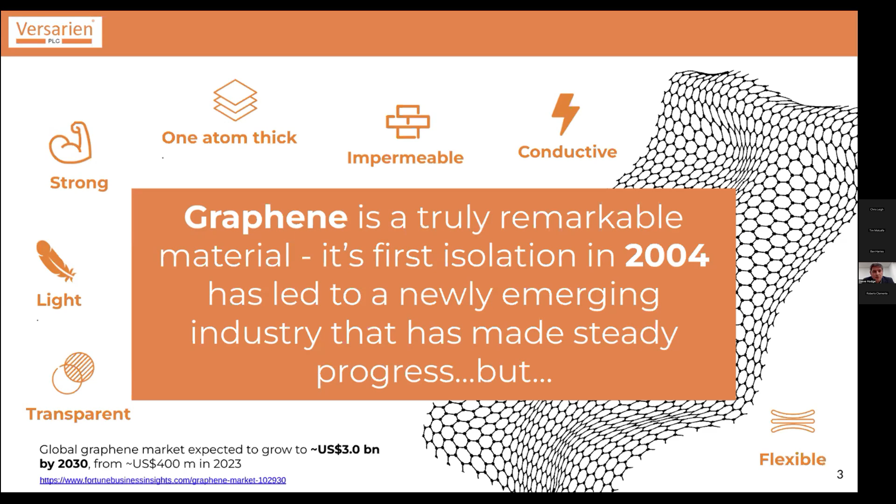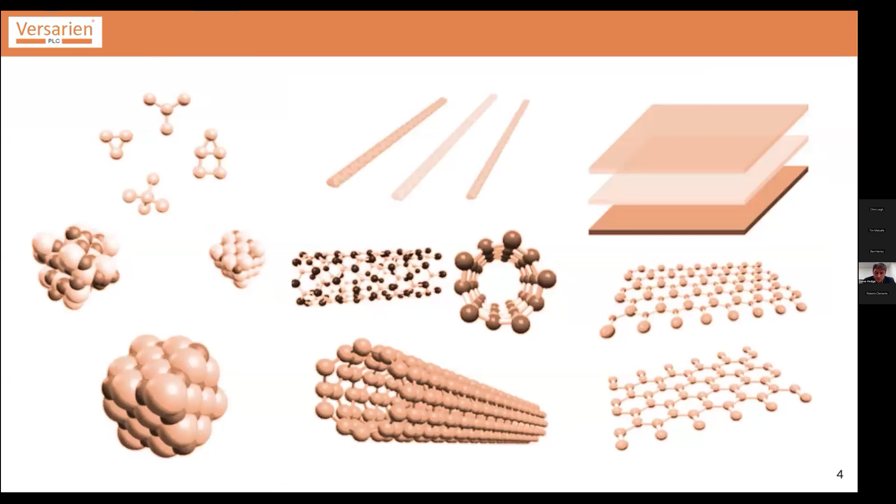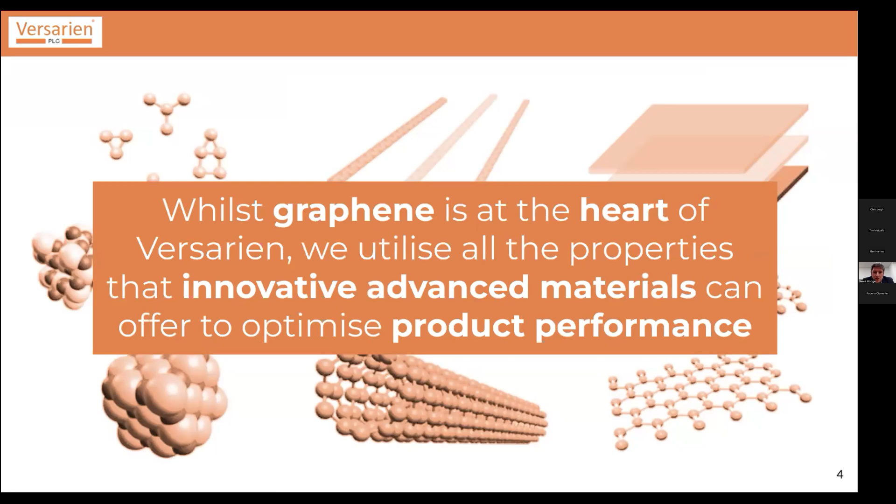Graphene will remain at the heart, but we're also working with a range of zero-dimensional metal nanoparticles, one-dimensional carbon nanotubes, and other two-dimensional materials in the graphene family. So whilst graphene is at the heart of Versarien, we utilize all the properties that innovative advanced materials can offer, such that we can optimize product performance and give our customers the best product that they require.

So in summary, we're an IP-led advanced engineering materials company. That's what we've been for a number of years. And we utilize proprietary solutions and technology that we take out of academia from UK and overseas institutes, and we create innovative engineering solutions. And to date, we are a globally recognized nanomaterials company. We've got a wide portfolio of high-quality materials, and this is underpinned by our UK-based R&D, which we're performing within graphene centres of excellence, such as Cambridge and Manchester University.

In terms of the board, currently myself and Chris on the call make up the exec team. I've been CEO since July 2023, but I was appointed to the board back in 2021. And my background is 15 years or so in advanced materials. My PhD was working on carbon nanotubes, graphene's older brother. And so I've had a vast experience with a range of different materials.

Our non-exec team, we have very strong support from Diane Savoury, who spent a long time with Superdry, taking them from SME to floating on the London Stock Exchange back in 2010. Susan Bowen, who has recently become the CEO of the Digital Catapult in London. And Sir Ian Gray, who was knighted last year, spent a long time in the aerospace sector and as chief exec of Innovate UK, and again brings a very strong technical background to the business.

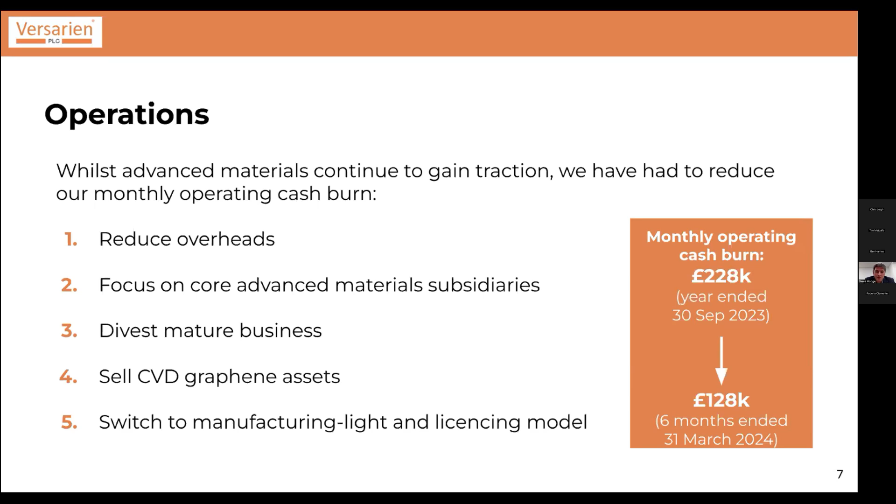We're in the process of selling our chemical vapor deposition assets that are in South Korea, and we've switched to a manufacturing-light and licensing model. So we're monetizing that IP that we've developed over the last 10 years and also that we've acquired. So these are our 5 core businesses. Versarien Graphene, that was established here in Gloucestershire a few years ago, and that's dedicated to manufacturing our graphene and advanced materials.

2D Tech was a spin out from the University of Manchester that was acquired in 2014. And again, that technology we're still developing and scaling up the production of graphene powder that came from 2D Tech, and that's being performed now in Longhope in Gloucestershire.

Cambridge Graphene was acquired in 2017, and that business grew from developing novel 2D inks and dispersions utilizing graphene and other similar materials. In 2018, we acquired Gnanomat in Spain, so that was our first venture overseas, and Gnanomat's focus is on energy storage materials, and Roberto is going to talk you through some of the activity that Gnanomat's been performing over the last 12 months.

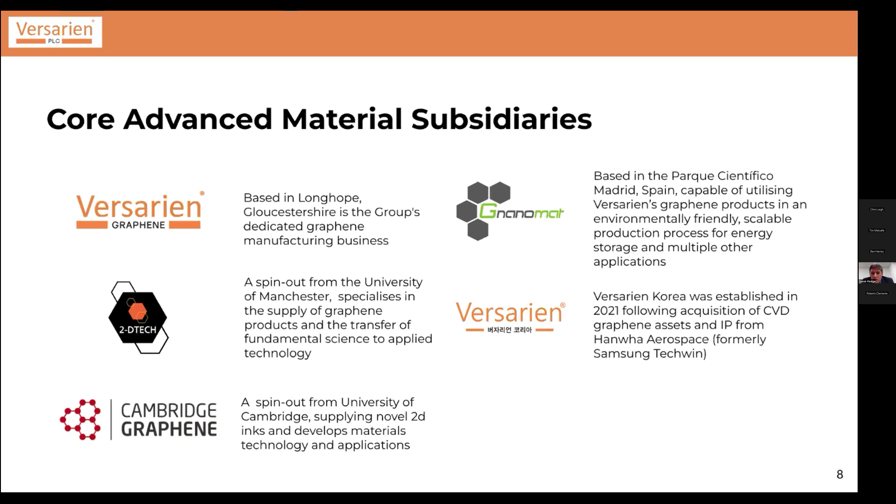In 2021, we established Versarien Korea. Again, that was following acquisition of assets from Hanwha Aerospace, so a lot of IP and also the equipment to manufacture high-quality single-layer graphene. And that's equipment that we're in the process of selling to another Korean partner at the moment. So these are our bases in the UK and overseas.

So in South Korea, we are co-located with Graphene Lab, which was a company that invested in Versarien during our move to South Korea in 2021. And we also have a foothold still within the GEIC in Manchester and people located within the Cambridge Graphene Centre in the University of Cambridge.

So in terms of those mature businesses, the intention was to look at selling both of those together. So AAC Cyroma, which was a plastics business looking at injection molding and vacuum forming of products, mostly for the automotive sector, and Total Carbide, which is our hard-wearing tungsten carbide company. Unfortunately, because of the differences in these businesses, they're quite diverse. The customer base is quite diverse, as well as locations. It's not trivial to sell them together.

So back in September 2024, we announced the sale of AAC Cyroma to Harper Bennett Limited, and the first of those installments is due this month. With Total Carbide, we have ongoing discussions with 2 parties, but these are still in fairly early stages.

In terms of the CVD assets, as I mentioned, these are equipment we acquired in 2021. In March 2024, we entered into an agreement with MCK Tech in South Korea. So MCK Tech is a relatively young company with the CEO, Dr. Sungmin Cho, who was one of the initial inventors and is on most of the IP that belongs to Versarien. And so it seems a natural fit to sell it to an owner that actually has ideas and knows how the equipment runs and operates and can run a successful business using this equipment.

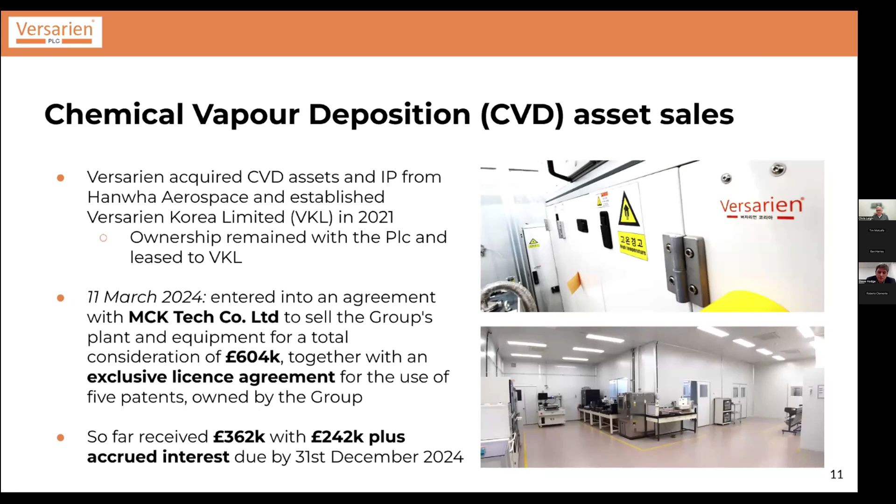So the group structure currently looks like this. We've got 43 people in total across the whole business, 21 of those sitting within Total Carbide. So the remainder are within the advanced materials divisions.

We've notably increased our stake in Gnanomat from 62% to 90% over the last 6 months. And that was a convertible loan that will allow Gnanomat to now apply for local government funding, which could be quite significant for the company. Versarien Korea is 85% owned by Versarien, with the other 15% owned by our investor Graphene Lab, based in South Korea.

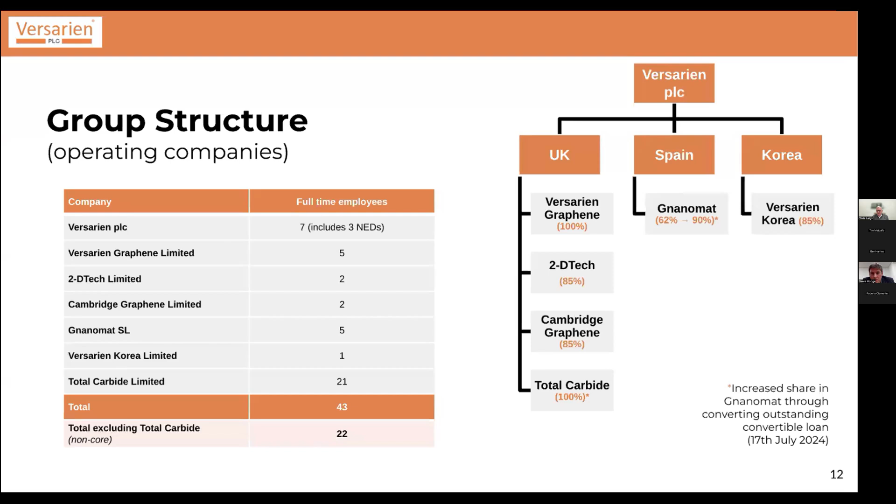Chris, I'll pass over to you for this slide. Thank you very much, Stephen.

Good afternoon, everybody. Obviously, with the audit ongoing at the current time, there's a limited amount that I can say about the current financial position, but I just wanted to address a couple of points, if I may. If we look back to December 2023, we announced that the company's projections were showing an EBITDA positive position being reached in the second half of 2025, obviously assuming the conversion of sufficient opportunities into revenues for the company. Our current projections have not changed in this regard, so we're still expecting the same thing, but obviously it depends on a number of assumptions.

In terms of the balance sheet, one of the things I know is of interest to shareholders is where we are with the Innovate UK loan. And we announced back in December 2022 that Innovate UK had offered to vary the terms of that loan by deferring commencement of the capital repayments so that they began in August 2025. So that first capital repayment of 500,000 is due around the time that we reach break even.

Clearly, that's an issue that we have got to address and discuss with Innovate UK. But just to provide some level of comfort, and obviously I can't speak for Innovate UK, one only has to look at their website, and there's some remarks on there that say if you cannot pay back in line with the loan conditions, they will work with the company to agree on a way forwards.

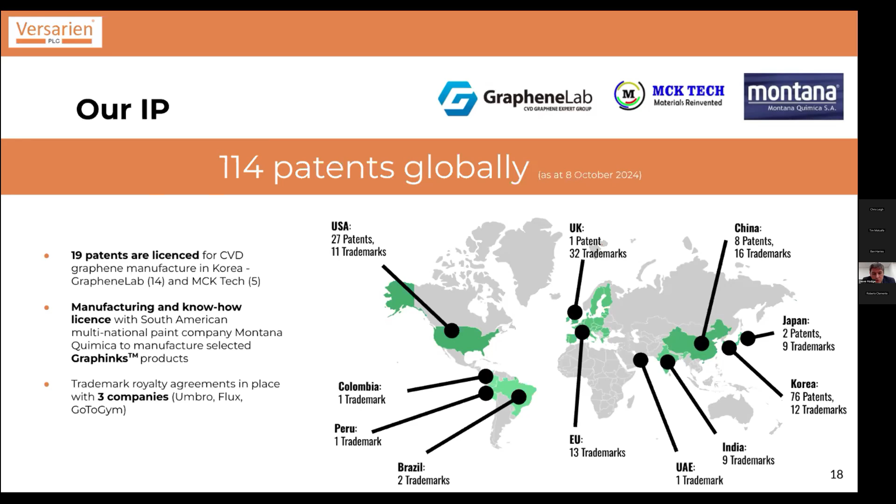We also have royalty and sales agreements in place with companies, and we're still pursuing a number of Graphene-Wear opportunities. Mostly I see this happening through companies such as GoToGym, so they're doing a fantastic job in South America, engaging with a number of companies to supply both Graphene-Wear formulations and graphene printed fabrics. With Flux Footwear, we're also working on larger orders, and we're trying to fulfill those at the moment. And again, we've had to look at moving some of the manufacturing and the compounding overseas where we can get lower pricing.

In terms of Umbro, we haven't seen any additional ranges being developed this year, and that's because Castore now own the license to some of the pro training and some of the professional sports from Umbro, and so that's conversations we need to start engaging with to try and get our products back into those clothing ranges.

So a bit on our licensing partners. GrapheneLab, as I mentioned, they were a strategic investor into Versarien back in 2021. And we have 14 patents which are licensed to them for CVD graphene manufacturing. So their focus at the moment is looking at a number of graphene applications, but with a main focus on extreme UV pellicles. These are materials used in the semiconductor fabrication industry. And recently they announced with some new patented technology that they can exceed 90% transmittance, which is quite a big milestone. And hopefully they can continue to develop that technology further.

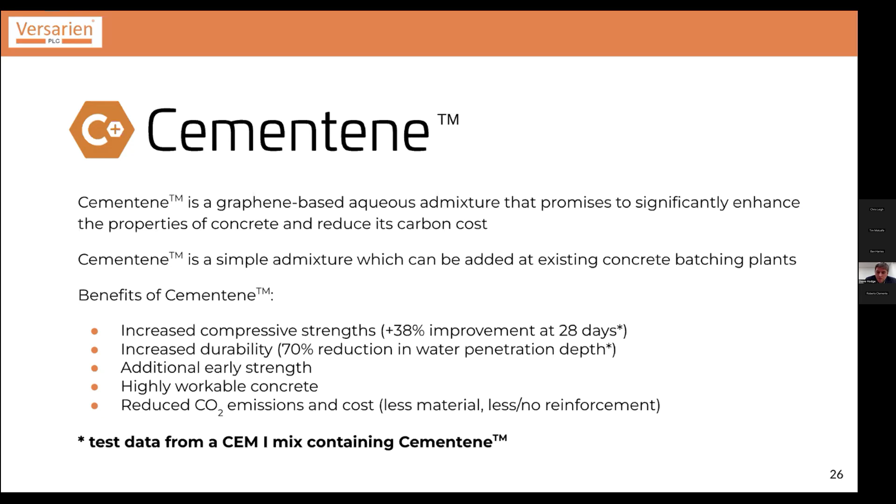And we're seeing improvements such as 40% of compressive strength, increased durability, both in water penetration and chloride migration. In some cases, getting better early strength, more workability, and we've also proven that we can reduce CO2 emissions. So just some highlights of results, not just improving one feature, but because of graphene's multifunctionality, we can also improve multiple characteristics at the same time. So we can improve compression strength, elastic modulus, and water permeability when we get the right graphene concentration.

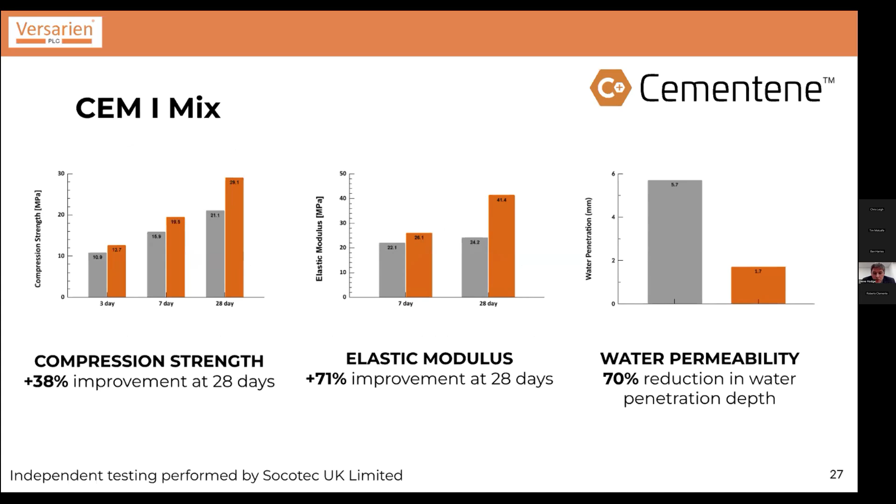So most of our work is done using independent test bodies, but now we're starting to bring our own in-house testing online. With Banagher Precast, we've reported this as an RNS in 2023. So we have some impressive results where, first of all, we looked at how we can improve the properties of their existing mix design. And we showed after 1 day, we can get 33% improvement, which is fantastic. If you can demold quicker, you can produce the precast structures much quicker, but also you're getting stronger concrete after 28 days.

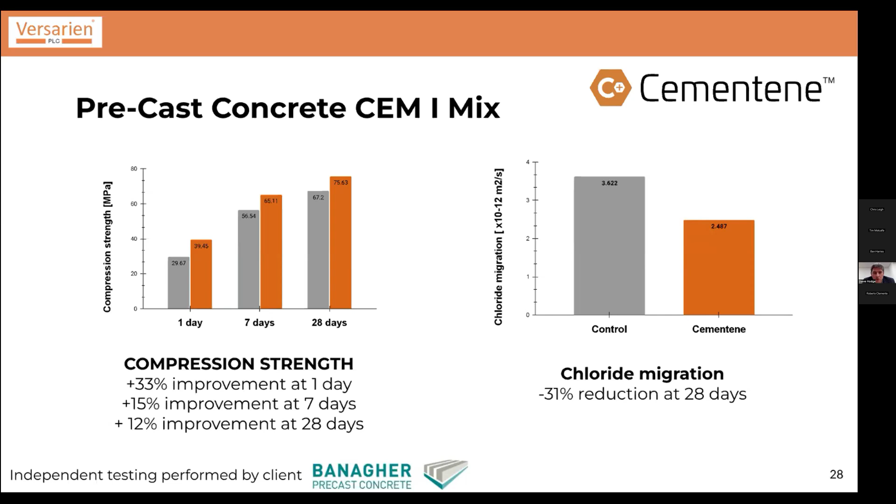One of the other benefits is chloride migration. So if you can reduce chloride permeation through a structure, then you can minimize corrosion of the steel reinforcement. So again, creating longer lasting, more durable structures. We then took those results and we looked at how much cement we can actually reduce. And we were able to maintain the same performance with 20% less cement. So that's taking about 100 kilos of cement out of their mix and replacing it with only a few kilos of our graphene admixture.

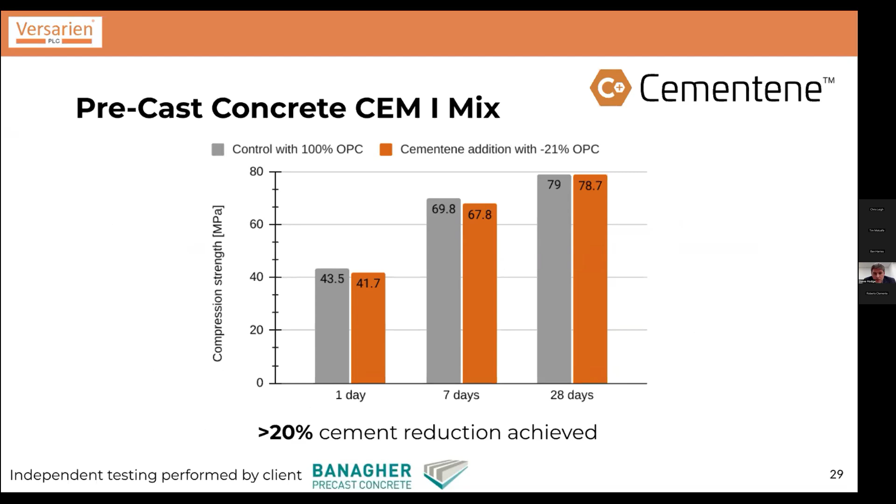We've then done further work this year, and with that same mix design, we've now cast some real life structures. We've been looking at traffic walls and putting those in the real life operational environment, and those will be studied over a 36-month period. Visual inspection and ensuring that graphene is not causing any unforeseen issues with the durability and the lifetime of those structures. So that's ongoing, and we're also now working with further trials with Banagher to further optimize the cement reduction that we're already observing.

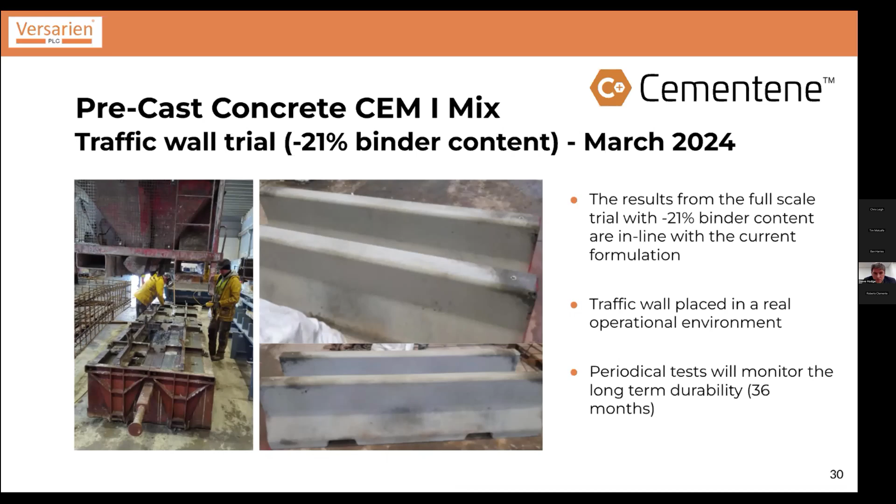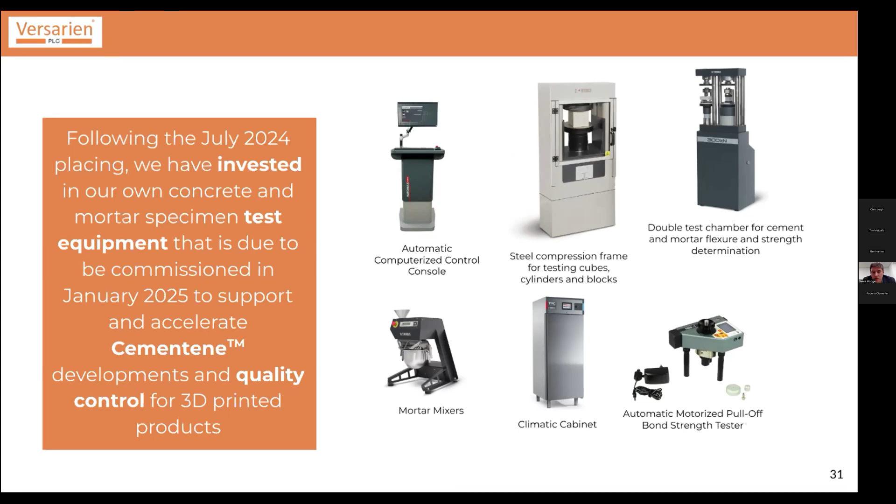So back in July, we had a placing, and some of that money was to be invested in our own concrete and mortar testing. So we've ordered that, and some of it has arrived. We're expecting commissioning to take place in mid-January, and that will enable us to accelerate the Cementene developments and also establish a quality control procedure for our 3D printed products. We've also been able to purchase some second-hand equipment and also additional molds that will allow us to increase our capability for how much concrete we can test at one time, and also water tanks that will allow for curing of more concrete samples.

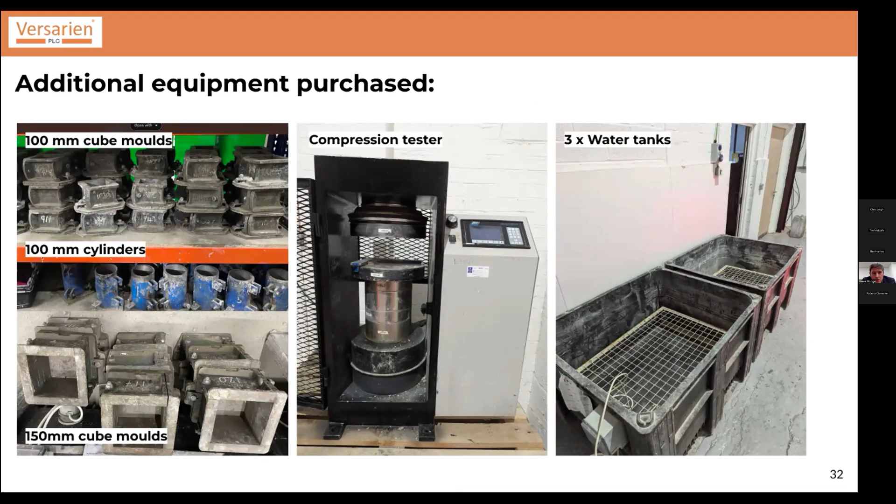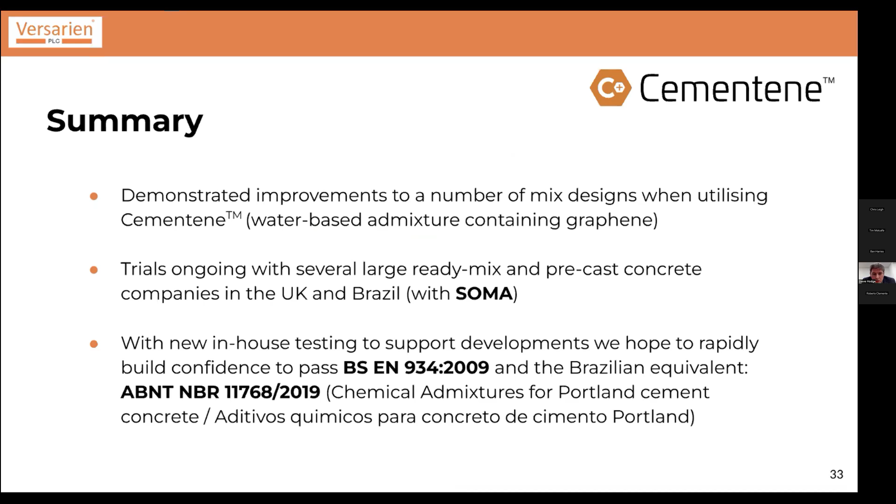So to summarize the Cementene aspect, we've demonstrated now improvements to a number of mix designs. We still have more work to do and more confidence to build with our mix, and also optimizing our Cementene recipe. We've got trials ongoing with a number of ready mix companies and precast concrete companies in the UK and now in Brazil through Soma and Montana. With our new in-house testing, we're hoping to rapidly build confidence and to accelerate our testing towards BS EN 934, which is the admixture standard, and also going for the equivalent standard in Brazil to make sure that these products can be legally sold in different territories.

I'm going to pass over to Ben to talk through the 3D construction activity. Thanks, Ben.

Hello, everyone. So I'm Ben Harries. I'm a former architect and current head of 3D construction printing, or 3DCP, at Versarien Plc. I thought it'd be a good idea to start with some of the key benefits of 3DCP, just as a primer for those who aren't familiar, and why it's important. So firstly, our process, as you can see down the bottom there, is quick and convenient. In-house, we can design, visualize, and print parts, and we can go from design to production in a matter of hours. So compared to other methods, it's incredibly quick.

Reducing carbon in the printing mix. So the mix we use is up to 32% reduction in CO2 emitted in the production of the printing mortar. More on this later as we're looking to further improve in this respect. Reduce labour, so there's no workers handling concrete or building or striking formwork on site. The modules are printed robotically under controlled conditions and then shipped. Material and weight reduction can be significant, with material savings of over 50% possible in certain scenarios when compared with solid cast options. The weight saving also then creates knock-on effects in terms of carbon savings during transport and handling.

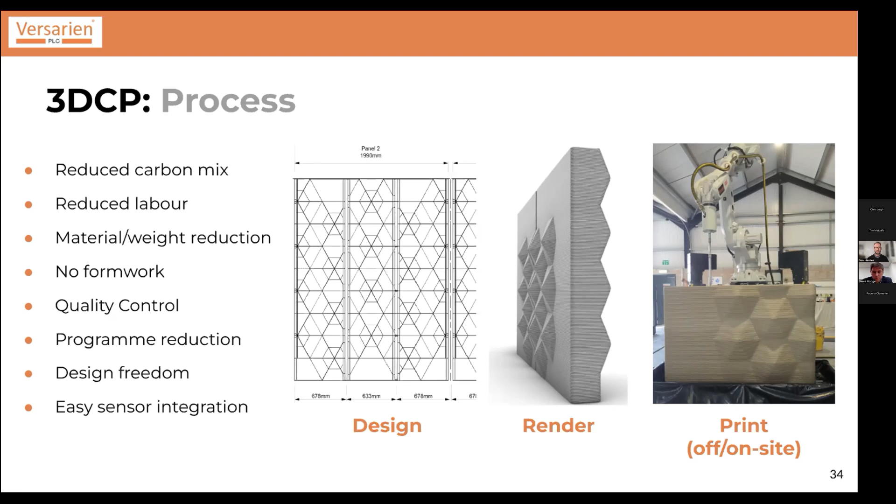So this head wall, which was produced in collaboration with Costain and National Highways, is now in place on site, and the project has been successfully concluded. This was a good demonstration of some of the benefits I just mentioned. By leveraging the ability of 3DCP to print curved forms and complex geometries, we're able to achieve strength geometrically as opposed to through the abundant use of steel reinforcement.

In fact, all of the steel was omitted from the walls in this piece, and the only steel that was left was there in the base, and this was needed to comply with Costain's own lifting and handling procedures.

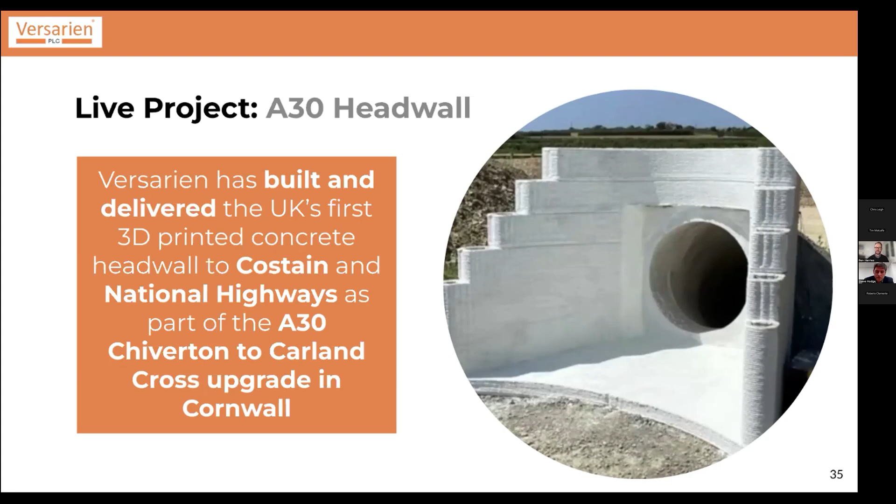Okay, so this is Charter Street. So this is by far our largest 3DCP project. This is working with Building for Humanity in Accrington. The project will comprise 46 apartments spread over 5 blocks. The first phase, for which we have been appointed, will consist of the first 3-story block and the community hub.

For this, we're acting as print partners for our clients. So this is a slight departure from our normal operating procedure, but quite significant. So what this means in real terms is that in the design phase, we're attending design team meetings along with the rest of the design team, architect, structural engineer, M&E, etc., providing professional consultancy services such as design support and technical input. And in the construction phase, our people will operate the client's 3DCP robot to get the building envelopes printed.

This is a significant step, really, not only because of the scale of the project, but also because it shows that beyond our factory production capabilities, our know-how and experience are also a valuable commodity. This will also significantly give us multi-platform experience, which is very rare in the 3DCP sector, as almost all players in the space are tied to a single platform, which has a specific set of capabilities.

Can we play the video now, please?

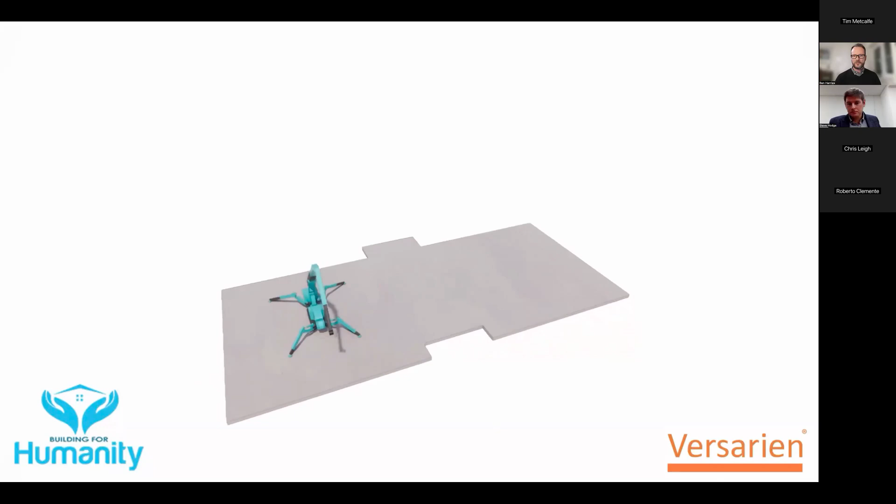This is just a quick video that you're going to see now demonstrating the construction sequence. It's just a simple video. So there you can see the ground floor slab. And so this is the robot that we'll be using with our clients at Building for Humanity. So as you can see, what we're doing is we're printing walls at the ground floor, each from one position on each side of the building.

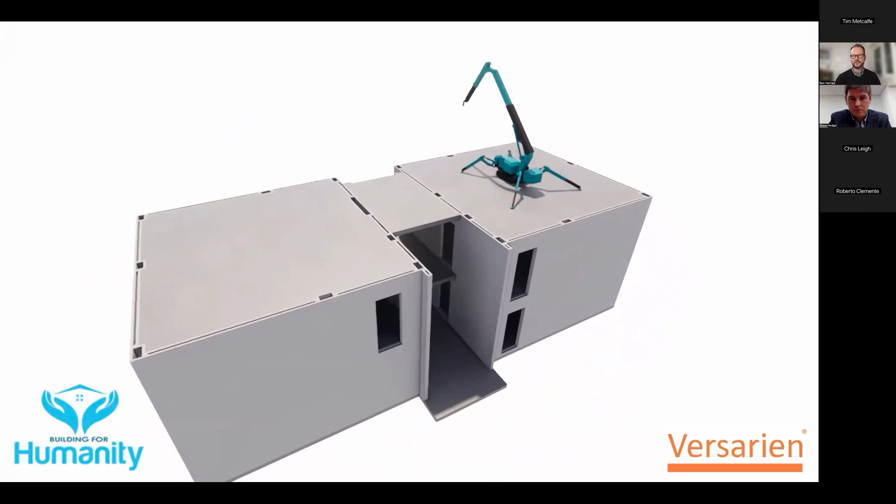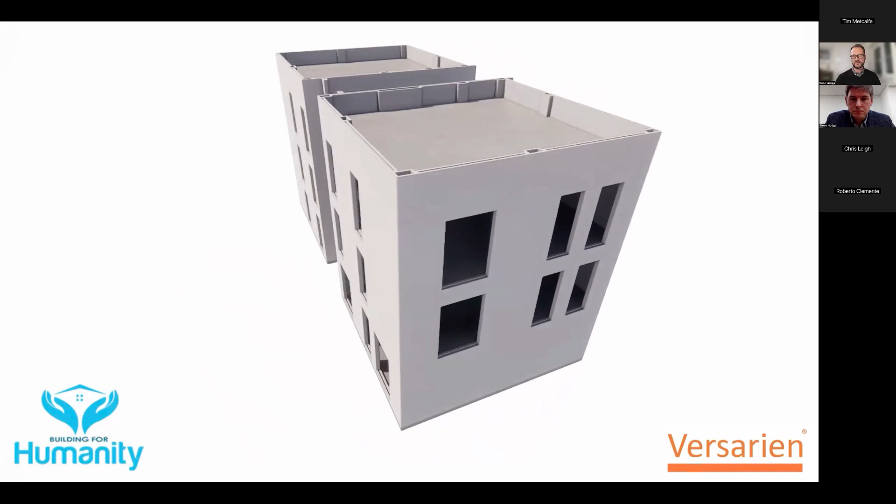Then we're moving it up, we're craning it up onto the next level, printing the walls, installing the next floor, and repeating the process. At the end of the process, of course, all the usual fit out will happen, as always happens with buildings. That will be finished to the design team's specifications. It will look very much like a traditional building. And this is to comply with planning especially. I think there's a limited appetite for unusual looking 3D printed buildings at the moment, so it's a softly-softly approach at the moment.

Next slide, please, Steve.

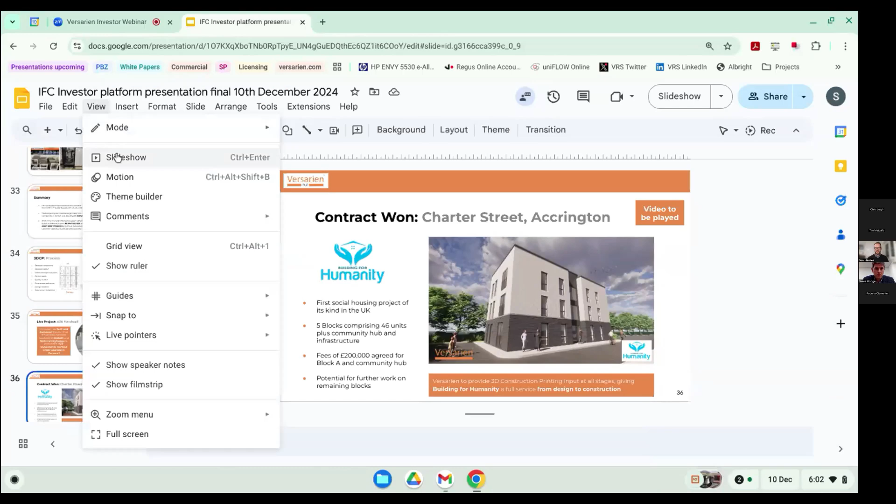Okay, so this Chinese gateway project will be a world first, very exciting, and is to be constructed in the heart of Birmingham, Chinatown. So having successfully completed the first phase, which was the feasibility study, we're due to commence the design phase early next year, moving through to the printing and construction phases as we move towards the end of 2025, pending appointment on those elements.

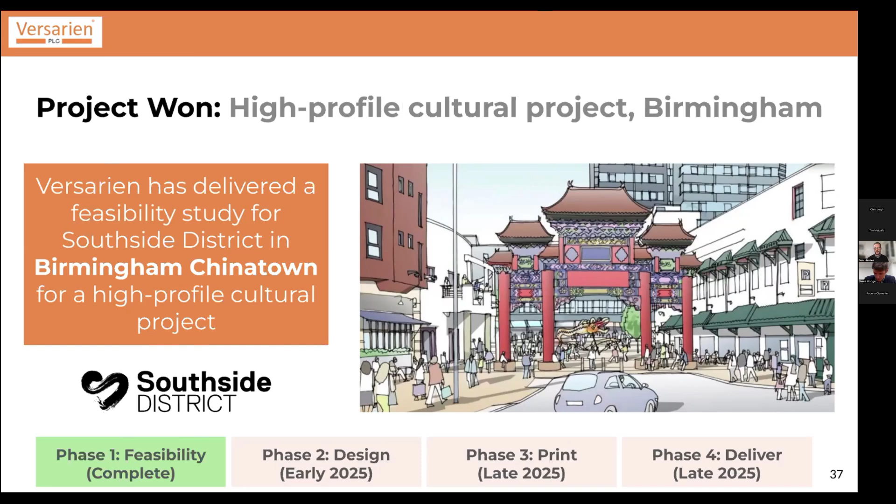So the Balfour Beatty Print Build Zero contract is to develop graphene-enhanced mortars with Balfour Beatty, obviously. And this is significant for two key reasons, I think. Firstly, it represents a further opportunity to commercialize graphene and demonstrate the benefits for construction methods of the future. Not just that, but in partnership with a leading and trusted name in construction.

Secondly, all commercially available printable mortar mixes are currently shipped from overseas, adding additional cost, time, complexity, and carbon to the process. The UK, therefore, must establish its own production capacity and supply chain for printable mortar mixes if we're serious about adopting this technology in a sustainable way. The project also includes the production of printed test pieces in order to demonstrate the performance and commercial viability of printed assets going forward. And we're also collaborating on a separate technological showcase for 2025.

Versarien has a growing number of construction partners operating across all sectors. And as a founder member of the National Highways Roads Research Alliance and a partner in the Digital Roads of the Future programme, we're committed to developing further opportunities and applications in the highway sector, of course.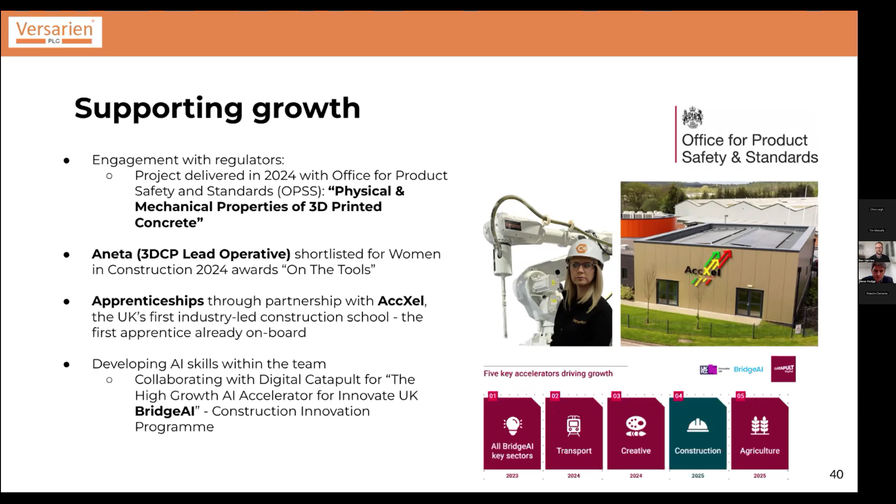And in 2025, we will be collaborating with Digital Catapult, setting challenges for the development of artificial intelligence tools to accelerate the use of AI in the 3D construction printing industry. Thank you.

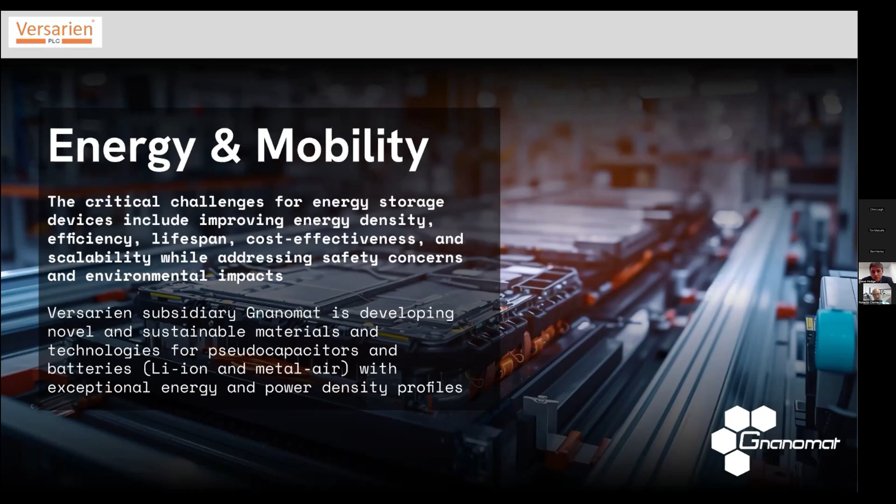Thank you, Ben. I think we'll pass over to Roberto now to talk us through energy and mobility. Thank you, Steve. So, good afternoon, everyone. This is Roberto Clemente. I'm the CEO of Gnanomat, one of the companies of the PLC, devoted to the development of advanced materials in the area of energy, not exclusively energy, but today I will talk specifically about this part. So, can we go to the next one, please?

So basically what we have is a platform for the development of nanomaterials. This platform is very versatile and allows us to manufacture and design hundreds, literally hundreds of materials with very different properties. So a collection of these materials was developed specifically to be part of electrodes of the energy storage device that we are calling the GnanoCaps. The GnanoCaps have a very interesting profile.

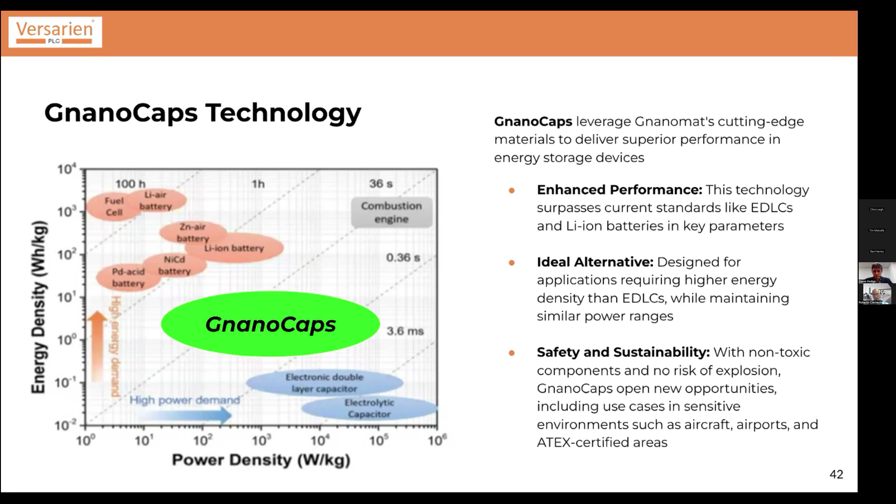However, it is not only restricted to this pair of energy and power where these GnanoCaps have major opportunities. If we see the part of the explosion risk, the current standard technology in the market, lithium-ion batteries, have this risk of explosion that makes a major problem in different situations. In addition, the technology that we have is eco-friendly, which allows it to be used in some situations where there could be ecological problems and restrictions. So if we go to the next one, Steve, please.

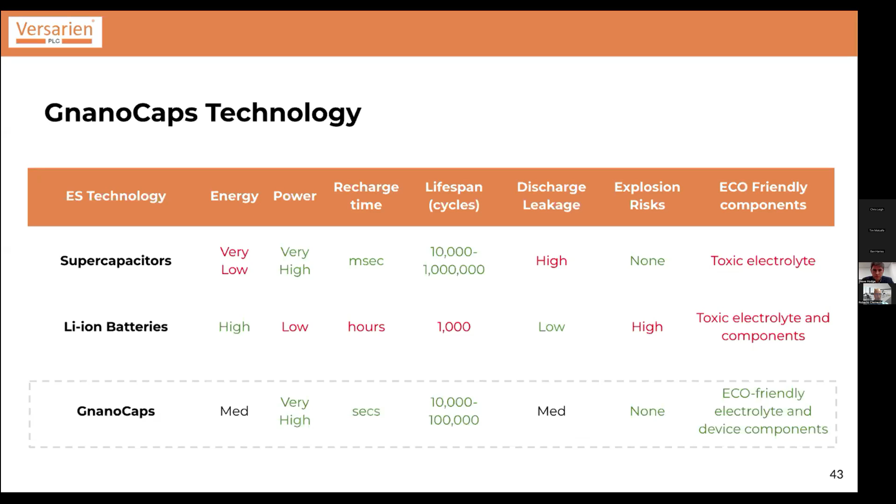If we take a look at the market, there are some very interesting and descriptive opportunities and applications that we can remark. One of them, for instance, are the AGVs, these automated guided vehicles that, when they are operating in ATEX atmospheres, have to avoid any potential situation of explosion. So it can be a very clear substitute technology for lithium batteries in that specific application.

Additionally, when we go to airports and aircraft, we have interactions with these final end users. They're trying to avoid any kind of safety problems there because it has happened previously, and we probably heard about problems of explosions of lithium-ion batteries. There are a number of different situations where these GnanoCaps can be used because the risk of explosion is completely removed.

Another very descriptive application would be the cranes in ports, where with other alternatives there could eventually be leaks of the electrolytes, causing ecological problems with the leak of these solvents into the marine environment. However, our technology can provide the power required for these cranes. We can even increase the time that we are providing energy because the profile is very good in terms of energy compared with supercapacitors, and there is not any ecological risk using this.

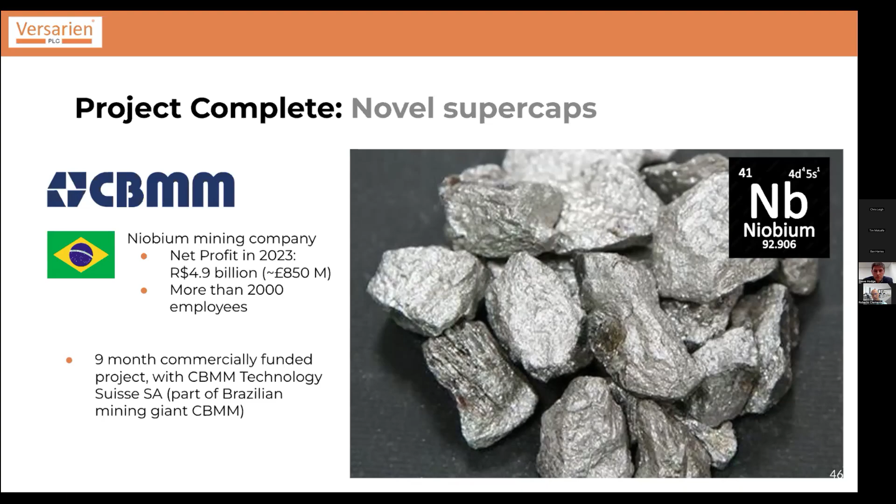Thanks, Roberto. So moving on to electronics, which is the fourth strategic research area outlined by IAM4EU. In the last few years, we've already established our graphinks portfolio of functional inks for conductive printing, inks tailored for things like wearable devices. In recent times, we've been seeing increased sales of these products, not just the ink, but also developing our own prototyping services. We've been doing lots of work on wearable heaters and printing those using facilities we now have in Longhope in Gloucestershire on polyester and also onto flexible or conformable substrates such as DuPont's Intexar polyurethane films.

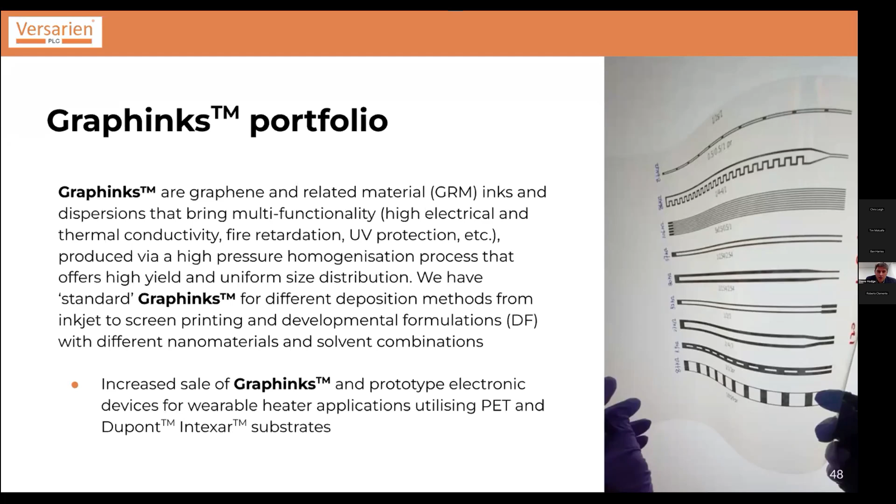In the last six months or so, our Cambridge Graphene team has been working on an ImpressMade project. This is European funding, looking at a near-field communication antenna that we had in mind to develop. One of the challenges with printed electronics is the use of lots of metal, lots of silver, and non-biodegradable substrates such as polyester. So our intention was to look at developing a new ink formulation that could be more ecologically friendly, has better conductivity to meet the specs of near-field communication, and could also be printed on recyclable, biodegradable substrates.

So we just presented this work in Brussels last week. Our colleague Daniele, one of our senior scientists, was out there showcasing the improvements that we've made. And really what we've done is created a hybrid ink between graphene and silver with a significantly low amount of silver, but with almost five times or more the conductivity of our graphene ink. So that's enabling us to now access other applications that weren't possible before with just our graphene ink formulations. Roberto?

At Gnanomat, in the last 18 months, we've been working on a project, the Innova project. It is a project funded by ICEX, a Spanish institution, which awarded us a grant of up to 415,000 euros for the development of new facilities and a new portfolio of conductive inks. In this project we've designed new inks that are now completely part of the Versarien portfolio, in addition to those that existed before, increasing the possibilities for the final customers to acquire more and different alternative inks.

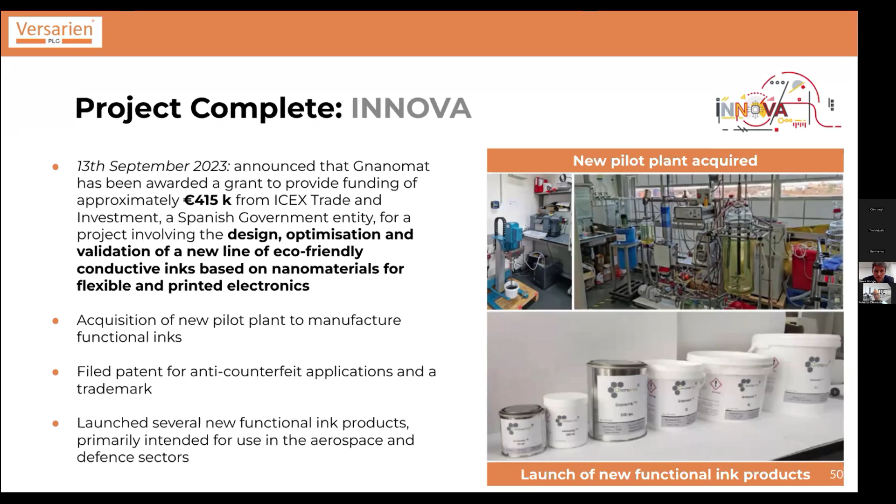We've acquired the equipment to make a new pilot plant for the manufacturing of these products, and we also applied for a patent and made a trademark. Basically, all these efforts were aligned to launch a new business line that will be on the market in the following months. Okay.

So this week we've also announced the signing of a distribution agreement. So we're now accessing more high-tech products, working with MCK Tech and a barristor company. This is a graphene barristor sensor platform that can be utilized by medical diagnostics companies. The barristor is not a novel technology; it's been around since around 2012, published in Science by Professor Hyun-Jong Chung, who is now the CEO of a barristor company. With this device, we're overcoming a lot of the existing limitations of graphene-based field effect transistors.

So the beauty of the barristor is that we can achieve high on-off ratios, and we can have sensors with sensitivity orders of magnitude higher than the current state of the art. So really, this is a technology that can revolutionize rapid point-of-care diagnostics. We'll be providing these chips, which already have a surface functionalization that can be modified by the end customer or tailored to suit whatever the customer intends to put on the graphene surface. As you know, graphene is a great sensing platform, but you must carefully functionalize the surface to enable you to detect specific viruses, bacteria, diseases.

And so we'll be providing an intermediate product to the diagnostics companies such that they can further develop their enhanced sensing systems. And again, the technology is not just for biosensing, but can be adapted to monitor things like gases, chemicals, and temperature. And the ultimate challenge and vision is to create a multi-sensory platform that can minimize a number of devices into one chip.

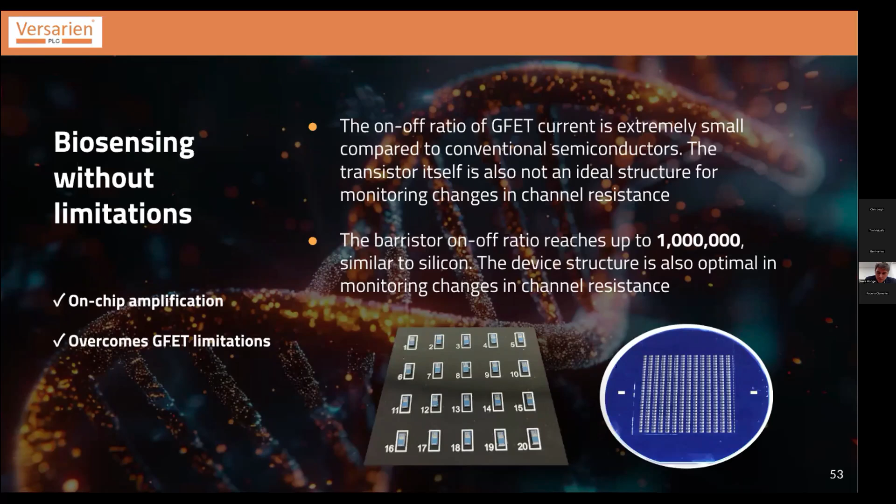Moving on to commercially funded R&D and grants. So essentially, we're active and we have a track record in a number of industries. We've obviously developed lots of prototypes, and we've had Innovate UK funding in a number of areas. The Airbus project we worked with for the last 3 to 4 years on aircraft de-icing. We're now looking for grant funding to take that further and to enhance the TRL level to push it through

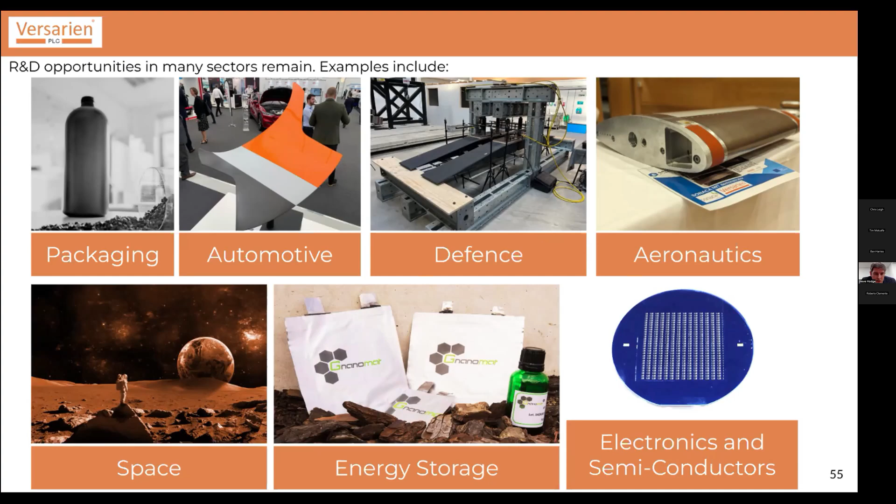to commercialization. And so we're exploring R&D opportunities in a range of these fields, but predominantly focusing on areas that, as I mentioned, are key to the future of Versarien: construction, energy, electronics, and so on. But we also talk a lot about commercial R&D, and just to explain what that means, that means the project is fully funded or jointly funded by a commercial partner.

And we perform commercial R&D in a number of areas, particularly developing novel materials, as you've seen from the likes of Balfour Beatty and CBMM. We've talked about these companies funding these R&D programs. And so we've now got a number of large global companies on board that are funding R&D with us. So in the last year, just to highlight a few key projects, CBMM has been one. We've also had a project with a UK aviation company that we can't talk about much. And the other significant one has been IRPC.

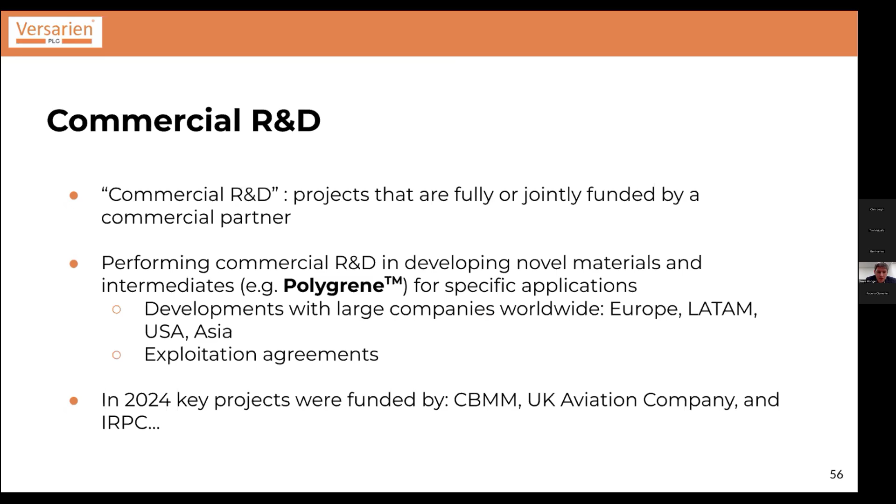So just to give you a summary, this is a Thailand-based listed company, part of a large group called PTT. And they funded Nanomat initially to work on a 9-month project to co-develop advanced materials. So they were supplying materials to Nanomat to be functionalized using our pilot scale chemistry functionalization. And those products were then being supplied to Versarien in the UK, so Cambridge Graphene and 2D Tech were utilizing those materials to put into different products and perform some material characterization and product testing.

So utilizing all of the skills within the subsidiaries to ensure that we can deliver these projects on time and achieve the targets of the customer. So these are incredibly important, and we see more of these opportunities coming. In terms of grants, we've been very successful in the last 10 years. In the UK, we've won more than 16 Innovate UK projects to date, and we've been a core partner within the European Commission's Graphene Flagship Programme.

Nanomat itself has also been able to fund almost half of its operating costs through grants and public funding. So we do see grants in the next few years to be also critical to the future of Versarien and supporting us till we get that full commercial traction. And currently we're awaiting the outcome of 4 grants, 3 from UK subsidiaries and 1 from Nanomat. So hopefully we can provide updates on those to the market when we receive feedback.

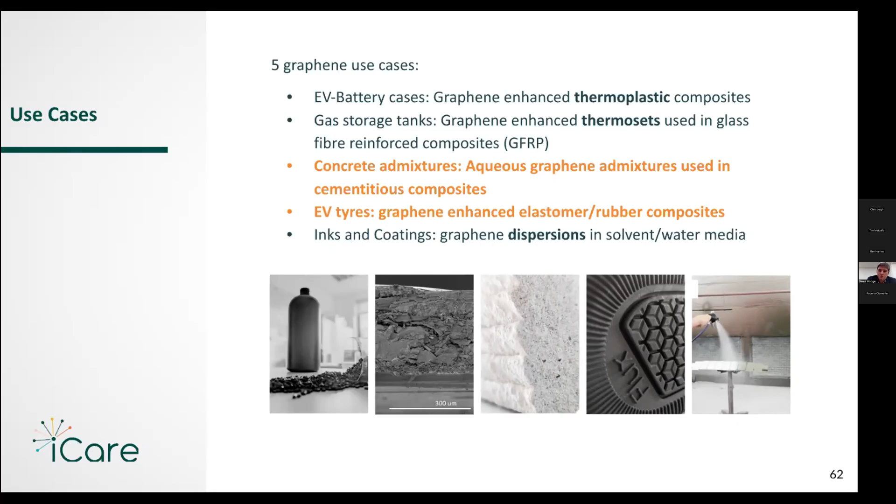So just to summarize, hopefully we've answered quite a lot of questions, but I just want to state, we are growing our commercial and grant pipelines. We've seen those increase quite a lot over the last year. We've increased our product offerings over the last year, but also this week, where we've now started to launch products in the healthcare sector for diagnostics. We're winning larger commercial contracts with global leaders. That's evident with our contracts with the likes of Balfour Beatty, CBMM, Building for Humanity, and hopefully those continue.

We're achieving a series of UK industry firsts, perhaps world firsts, with our 3D printed Chinese gate, but certainly doing the first 3D construction of homes in the UK will be a massive industry first. We're engaging with more industry sectors. I mentioned healthcare as one, which is a growing industry for us. We're nurturing talent and leadership within the company. Our staff certainly are developing more and learning more skills. Ben talked about the potential AI skills that we can bring on board.

We're also, as I say, investing in our in-house technical offering, and our staff are now learning about construction testing and what's necessary in terms of building that confidence within the team that our products are fit for purpose and can really be game-changing in their different industries. And with that, I'd just like to say we're focusing now on areas that will deliver. We're aligning with the vision that Europe has in terms of construction, energy, mobility, and electronics, and hopefully, as I say, those will deliver for Versarien and generate a bright future for us.